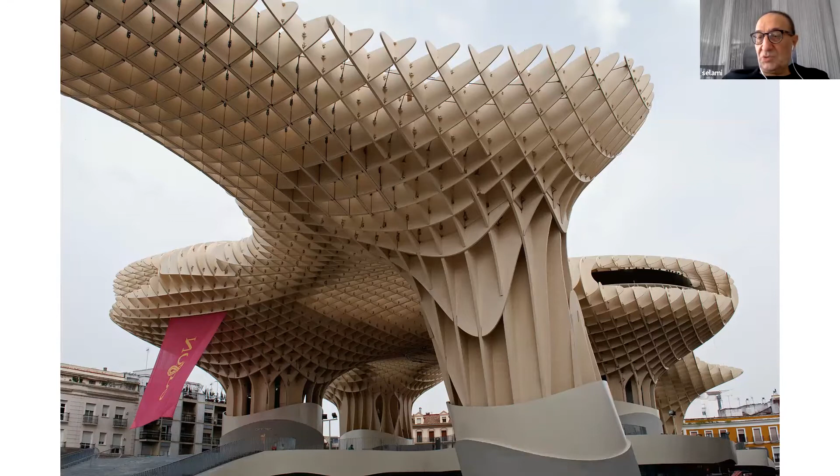Some of my friends, some of their work. Jürgen Mayer, from Berlin. Do you know this project? Metropol Parasol. Do you see my screen? Yes, your screen is seen right now. Okay, this is in Spain.

Only vertical elements in X and Y direction, a wooden frame structure. We worked with him, he also did the south border gate between Turkey and Georgia on the Black Sea, the Sarp sınır kapısı. That is his project for Georgia. It's a 30-meter high steel sculpture.

I don't know what it means, but you are architects, you can name it better than I do. But we did it. This is his image or model, and this is what I fabricated and installed over there. If you are planning to do such a thing, you need a good engineer next to you that you can rely on, who can teach you how to do it. When you look at the dimensions, you cannot carry it from the Turkey factory as ready-made, you cannot ship it there. So what we did was establish a fabrication yard just on the coast, on a jetty on the Black Sea, very near Batumi, north of Batumi. Fabricated, lifted, installed, bolted, welded, painted.

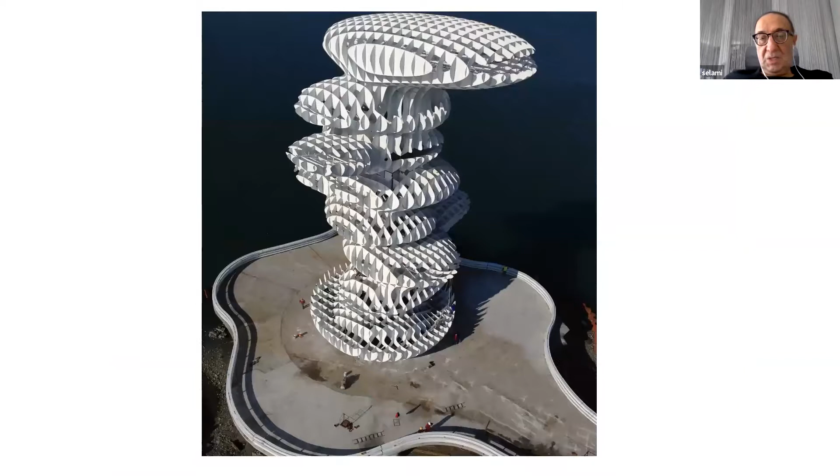This is another project. I'm trying to get some feedback from you, but let me first show you what was interesting for me, then we will discuss what is interesting to you. Such a job is interesting for me because it's not a common column, beam, roof, floors, ceramic, nothing. Here, everything is special.

Similarly, Mr. Fuksas, Massimiliano Fuksas from Italy, designed a shopping mall, Bory Mall, in Bratislava, Slovakia. It is a new development, a shopping mall, and here in the center is a garden, an inner garden inside the shopping mall. As you see, it is a roof and facade combined, and nothing is vertical, nothing is horizontal. All beams, members, all glass dimensions are unique, nothing is repeated.

This is on purpose. When I asked Massimiliano, why don't we make them vertical? He said, no, never in my life. He likes it this way, and that's how he designed it. This is what I built. Do you see my screen? Yes. Do you like it? It's a really quite beautiful grid shell, also the facade, and as you can see on the roof.

This has three functions. First of all, it's a primary structure—I'm talking about my steel here, my steel structure is a primary load-bearing steel structure. Secondly, it is an internal decoration element, there's nothing more, just my structure. I hate when an architect covers my structure because I make it so beautiful. You will see it now in all the details. You cannot do it with any plastering or gypsum, nothing can replace my structure.

But one day Mr. Fuksas said, Selami, I don't like those sharp edges here, can we get rid of them? I said, how do you want it? Send it to me. So he machined all those and said, I want such a node. This is his original design, in his color, the Ferrari color I think it's called.

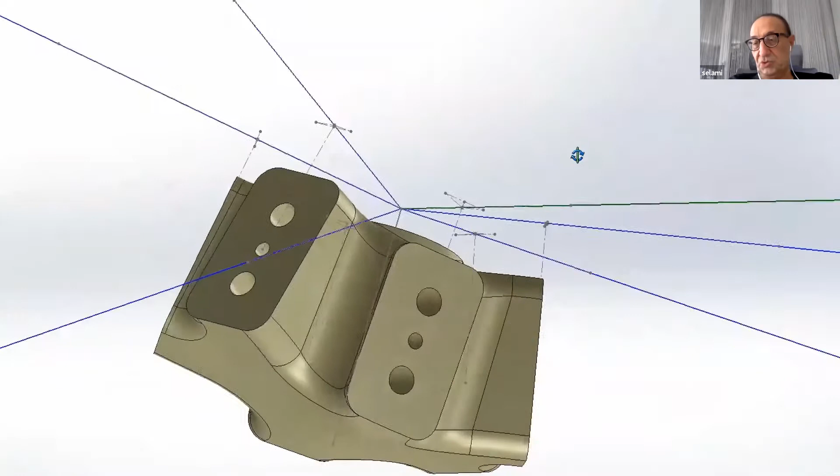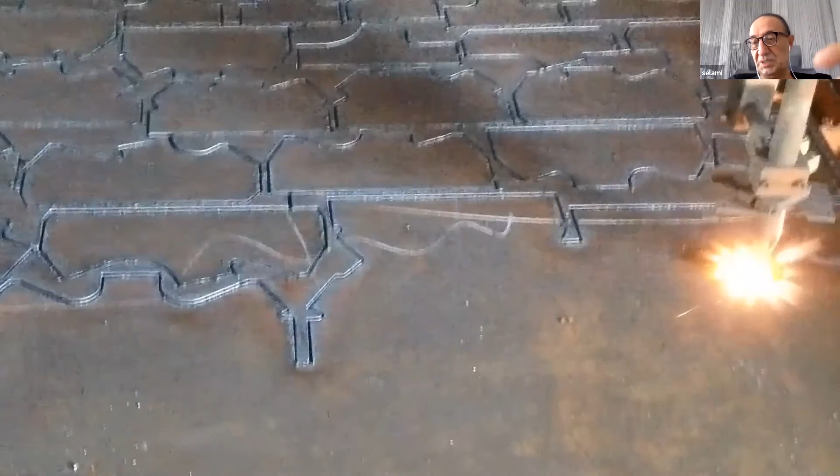Then we started using SolidWorks software. This is something you must learn how to use, dear architects. If you are only working with AutoCAD, don't stay in this job, you cannot survive. You need to move on to better software. I'll show you at the very end of my presentation how today's architects are working.

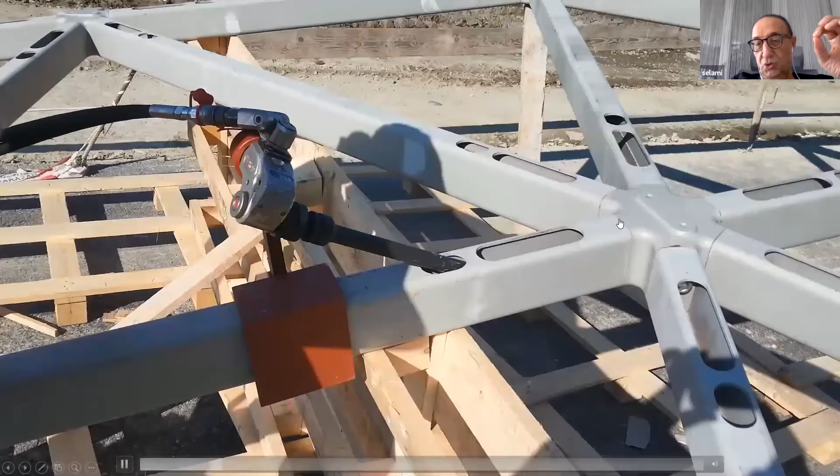Since I am a mechanical engineer, I know milling machines. With SolidWorks, we make the design on the computer and give the order to the milling machine. We finish the node, all precisely, and bolt it together through this opening. Then we close those openings, install on scaffolding one by one, apply fire protection painting, install the aluminum gasket system on the steel, put in the glazing and solid panels, and finish the structure.

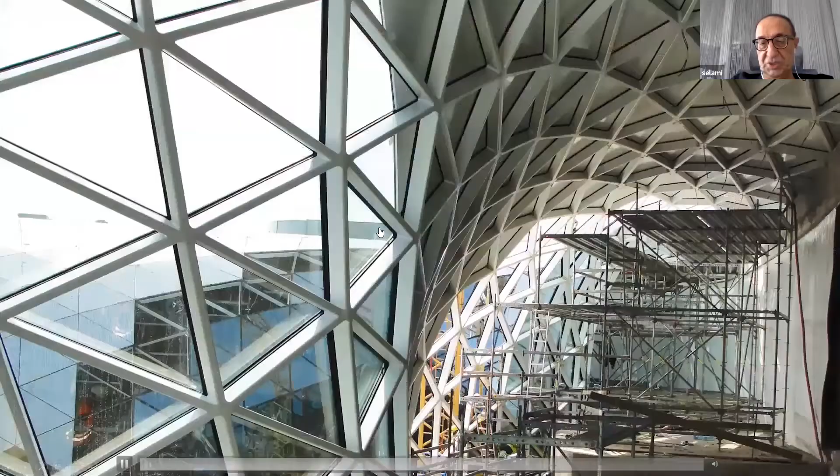I was telling you, this is an outer envelope in the meantime. This system has three functions: main structure, internal decoration, and external wall, all in just one shot.

I would like to show you this detail. This is my product, fully machined. We just bolt them together and make painting repairs, maybe apply the final painting inside. But there is no other alternative in the world to reach such an organic connection. This is why it's under my patent, called the organic node, worldwide.

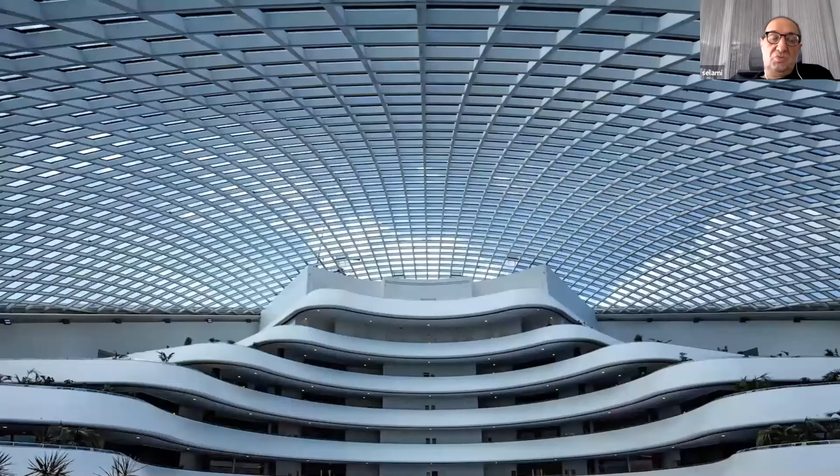Another famous project is by Foster and Partners from London, for Kazakhstan. Foster designed a library for President Nazarbayev, called the First National Library of Kazakhstan. It's 90-meter diameter, no columns, no beams, nothing, just roof. Like an eggshell or a skin, just members and nodes.

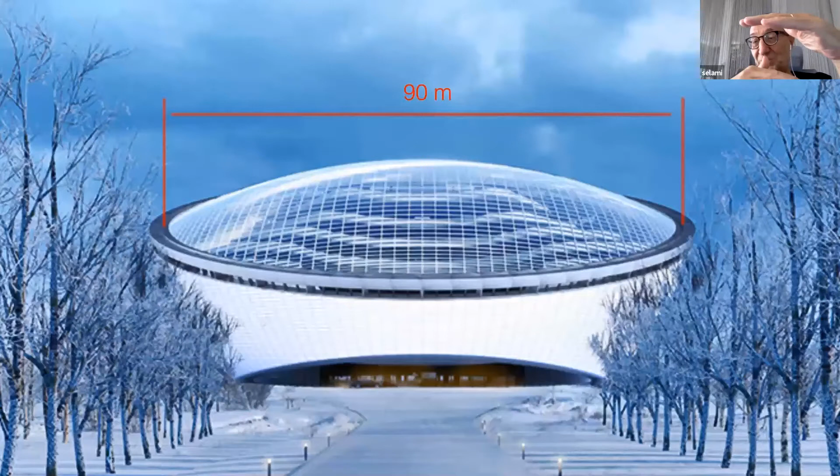90-meter diameter, and the important thing is the height of the steel beam is just 30 centimeters, 300 millimeters high, for steel members spanning 90 meters. If you ask any structural engineer what the height of steel roof members should be for a 90-meter span, they'll tell you 9 meters, or 5 meters minimum. We made it with 0.3 meters.

This is the structural model showing motion and movement. It looks like a balloon, very filigree, like a Greek shell. Of course it's an exaggerated movement, but when you step on the roof you feel like there's a kind of metro passing under you.

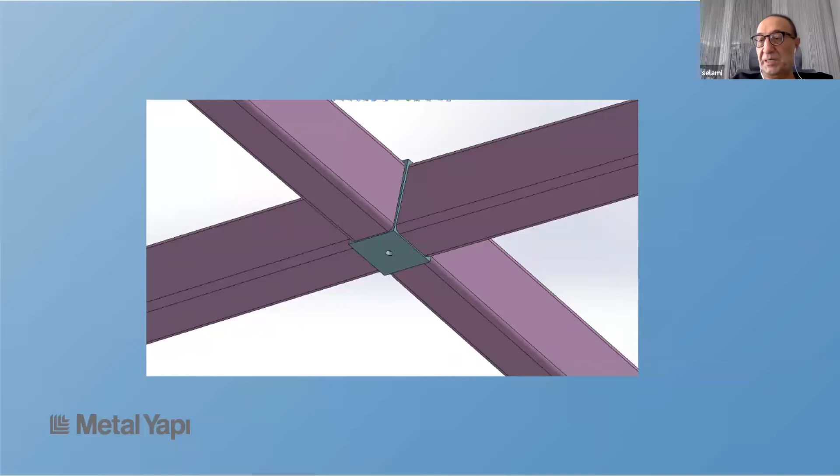You feel some movement. In architectural structures, the important thing is the beauty of the joint. This is not a pipeline where you see the bolts. That's why in my design, we hide the bolts through openings on the upper surface, which will later be closed with glass glazing.

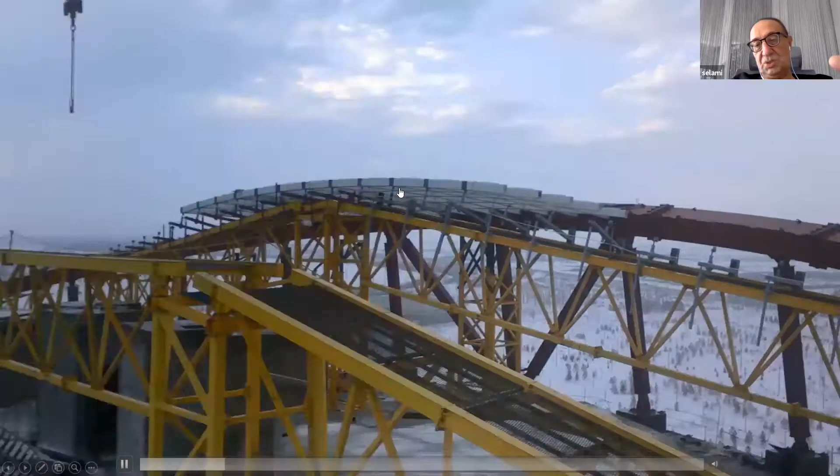Again, the nodes and members are all machined precisely, because any dimensional failure can lead to a collapse of the structure. The members are shipped to Kazakhstan and assembled on the ground in modules, then lifted up. Those yellow ones are temporary supports, about 500 tons, because until the roof is 100% closed, you cannot release the supports underneath.

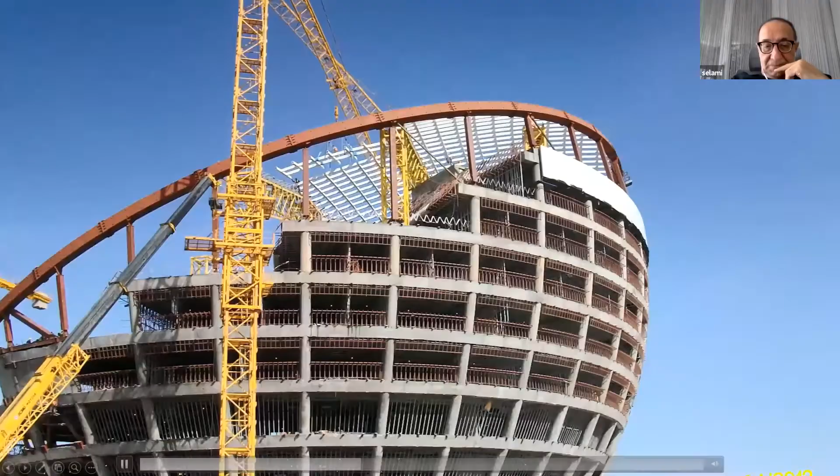See that yellow structure underneath, these are all calculated structurally. We need to calculate them and verify they are strong enough until everything is complete. Then we release the support, and the roof stands on its own structure.

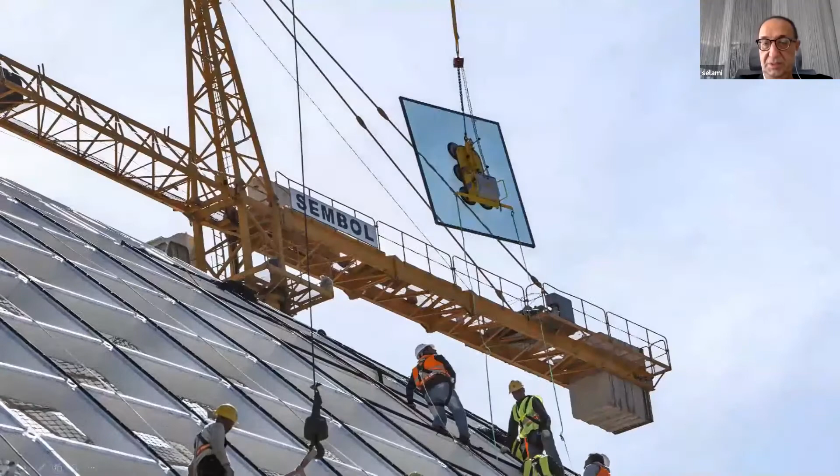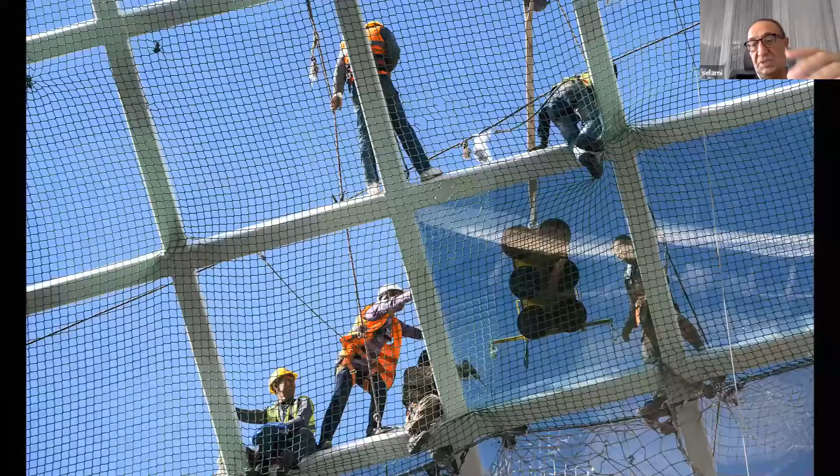Then we start again with aluminum, with glass installation. Installing glass is also done in steps. You cannot do everything, you cannot start from the top. You should start from bottom in a calculated manner. Everything should be calculated, otherwise, since it's a very thin structure, you can face difficulties.

Well, this is one of my favorite projects and one of the most difficult in my life. When my guys in Kazakhstan were releasing the yellow temporary structure underneath, I was waiting for their phone call: is everything okay? There were two alternatives. The roof stands or the roof collapses. There's no other alternative in such structures.

The original structural design was initially made by Buro Happold. Buro Happold is the right hand of Norman Foster. Every successful special architect needs a special engineer just next to him to call and say, I'm planning to design something like this, what could be the minimum size of the member? That's how it starts. You can't rely on yourself. If you are a special architect, you need to have good contacts with good engineers, otherwise you can't do it by yourself. Or you will finish both structural engineering and architecture, like Santiago Calatrava, for example. Mr. Calatrava is both.

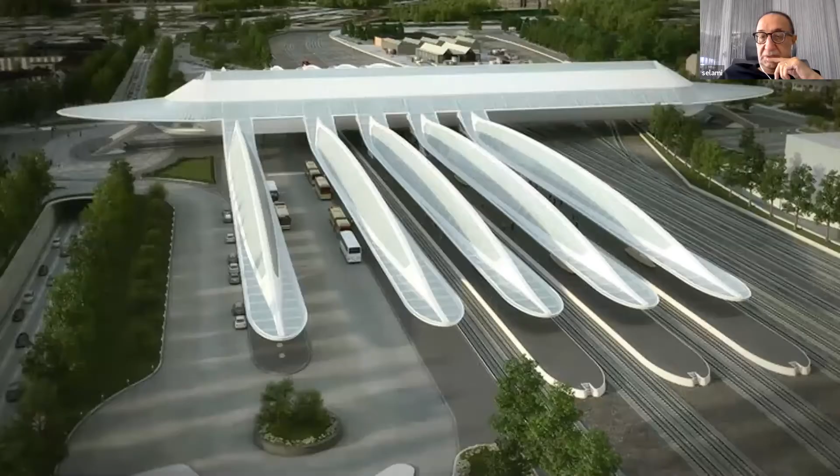So here we are with Santiago. This is Gare de Mons in Belgium, one of his latest. Oh, did I write Switzerland? He's from Switzerland, but that's an existing railway station.

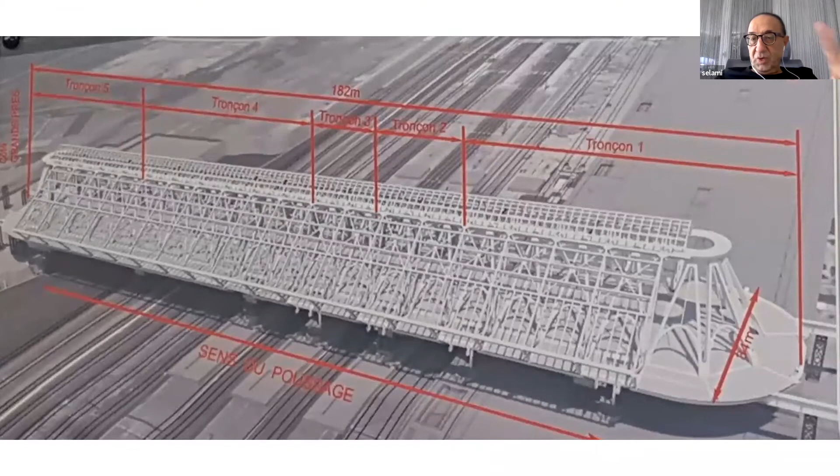You see, here we first pull 3,000 tons sliding. Check the wagons running underneath while we are sliding. Launching, incremental launching method, in the center of Europe, by a small Turkish company. We're not so small, but not a small company, yeah.

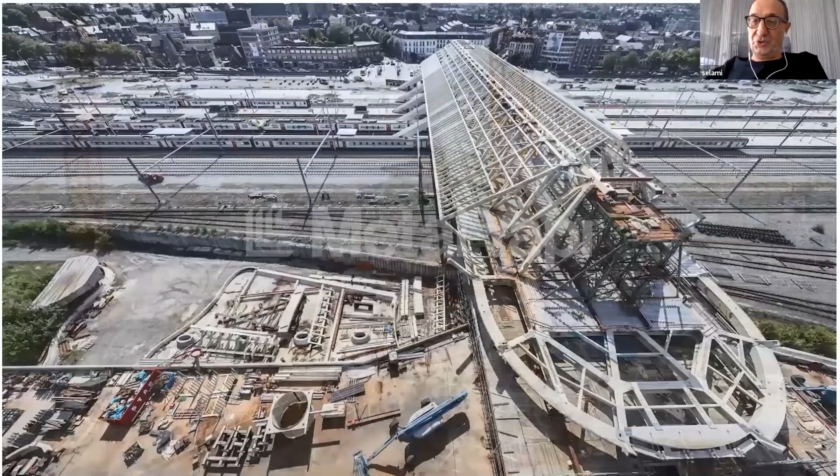If you've been to Kazakhstan, it can be minus 40 degrees. Right now I think it's -5 or so. We are in October. If you're in -5 in Kazakhstan and want to have a walk, you cannot walk on the street. It's very similar to summertime in Dubai - you cannot walk in summertime because of the high temperature and humidity. In Kazakhstan you cannot do it in wintertime. This is why you need a microclimate, an environment that you go into.

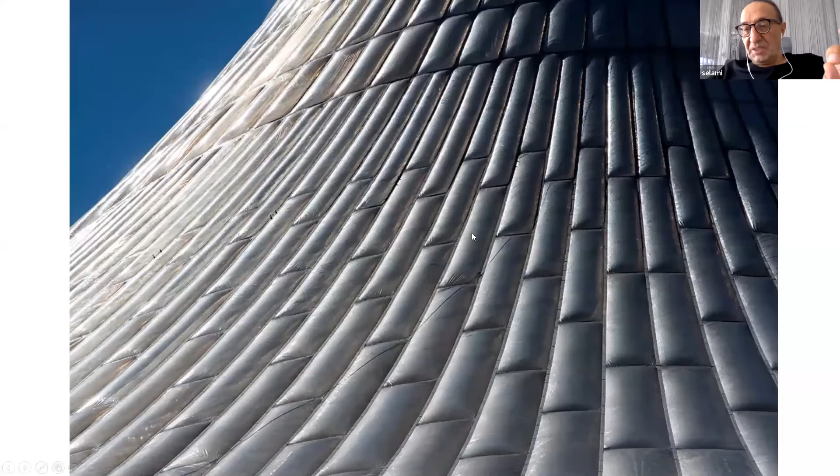The simplest way is to use plastic sheeting as a cover, but plastic should not stop the heat - we need something with a heat transfer value. This is why Foster decided to use an inflated plastic cushion. This is called inflated cushion, using ETFE, ethylene tetrafluoroethylene. Just a central post in the center, steel ropes, and cushions. Finished. This was the most economical solution because tensile elements can be very economical if you know how to use them.

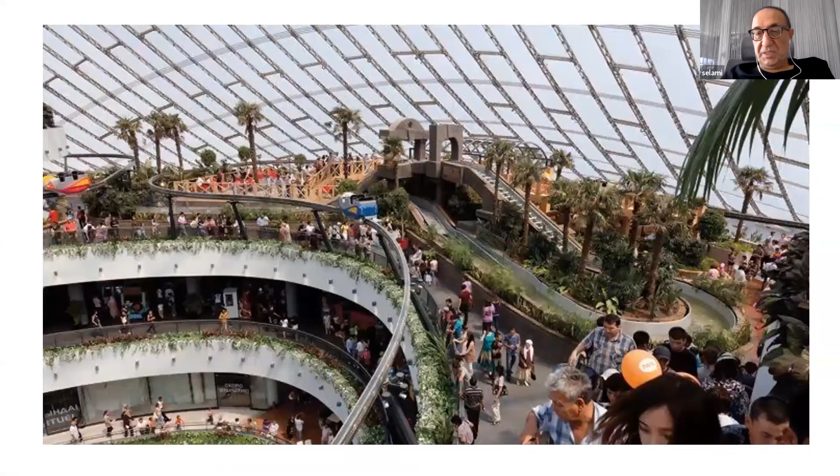Do you hear, Esa? I just wanted to give some explanation - if you have questions, you can ask at the end of the seminar. Sorry, my question was about the National Geographic video, do you hear it? No, I didn't hear it, sorry. We can only see the video but cannot hear it, unfortunately. Oh, that's bad. Well, anyhow, this is a video about me. You should hear it - there's a volume bar on the right side, maybe you can roll it up. We can hear it now. Selami Gürel - yes, you can hear right now.

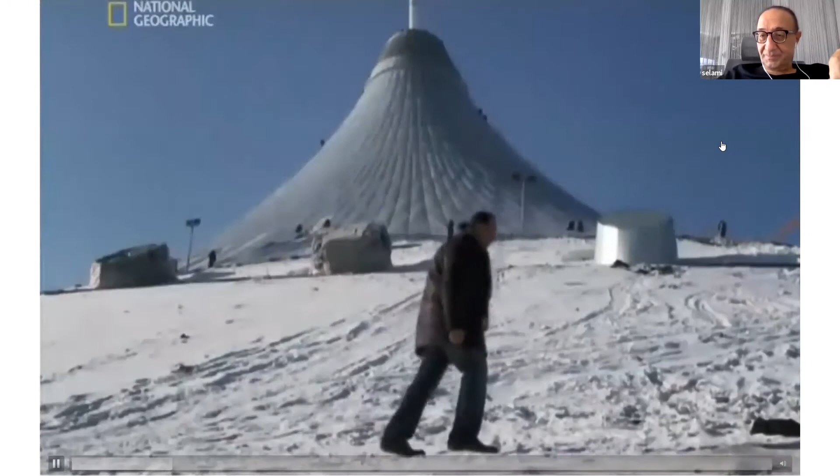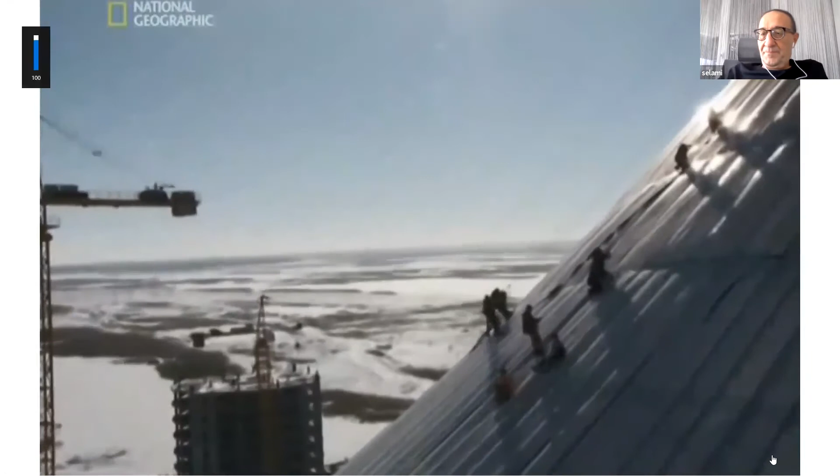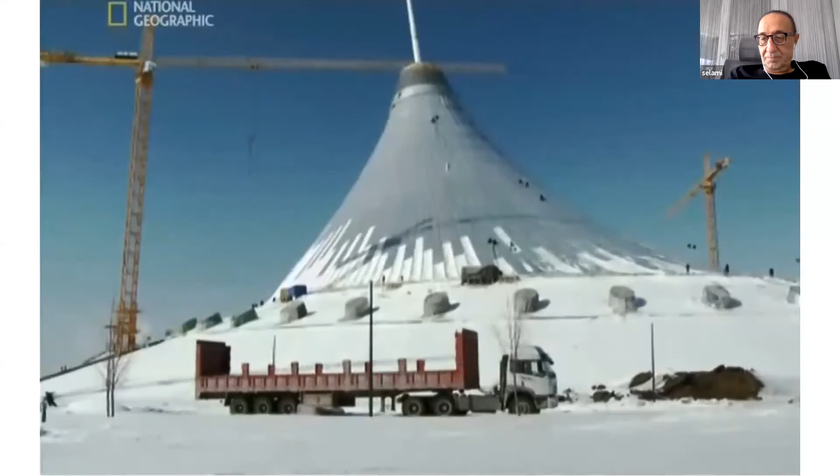The experts talk of the impossible. Selami Gürel says the pressure is just the time - everybody wants his building on time. But in this weather, it's very, very difficult. Even in a good year, winter in central Kazakhstan is bone chilling, and this winter has been unusually extreme. When the wind starts, you feel minus 55. It's so cold that for many workers it's a fine line between life and a freezing death. I remember one day they said someone is frozen up there, so the team went up and took him down. Such things happen - the frozen worker survived.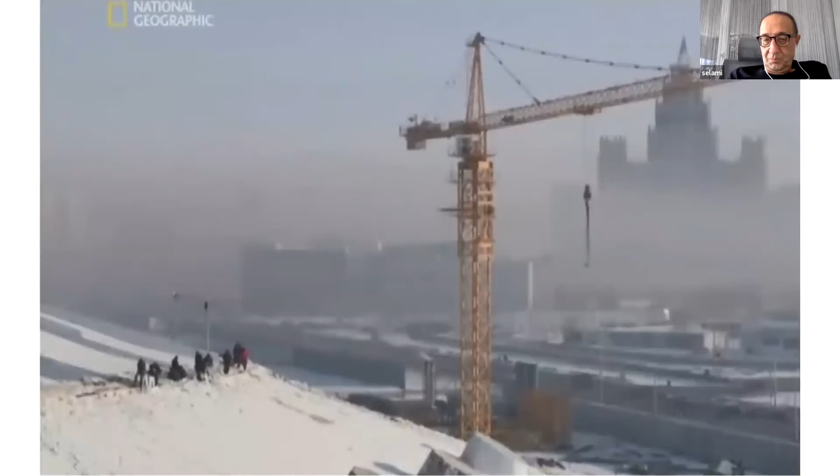But Selami faces a far bigger problem than the kiln - Kazakhstan's president, Nazarbayev. The president personally commissioned the building. He's tired of waiting for it and has demanded it must be finished in time for his birthday - just 18 weeks' time. And in Kazakhstan, when the president shouts, everybody jumps. The next stage is to build and erect the tripod pole, a 2,000-ton steel structure that will rise 150 meters into the air. Unfortunately, it seems no one can agree how they're going to do it.

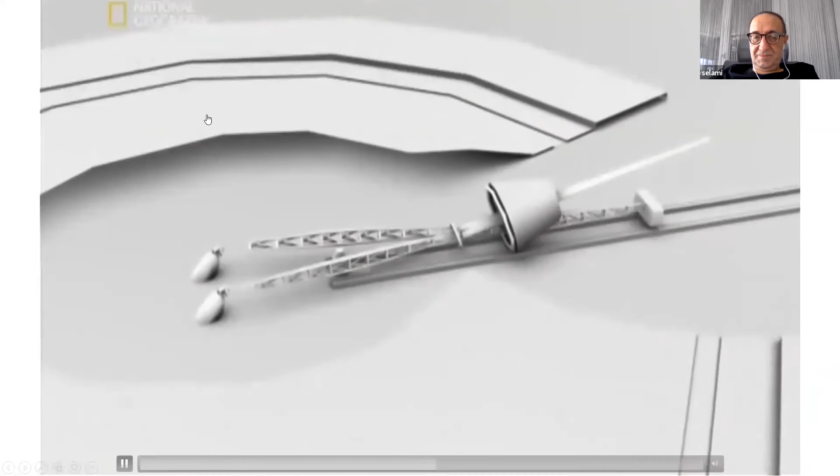Time to bring in the troubleshooter, Selami Gürel. Building it without further delays was a challenge Selami was determined to solve. Being a 58-year-old engineer, he had the idea that he wanted to assemble everything on the ground, then have nothing left to do in the air. Imagine, you should rent eight cranes - instead there will be high-tech winches. Selami's team will build a 60-meter tall tower, on top of which he will put specialist winches known as strand jacks. The jacks will pull up the tripod on its hinges, with the third leg sliding down the track into its final position. It's never been done before - no one knows if it will work.

Well, I think that's enough for this project. But method is important - how to do it. You cannot weld a 2,000-ton structure up at 100 meters at minus 40 degrees temperature. You must do everything on the ground, covering with tents, heating the steel, heating the welders.

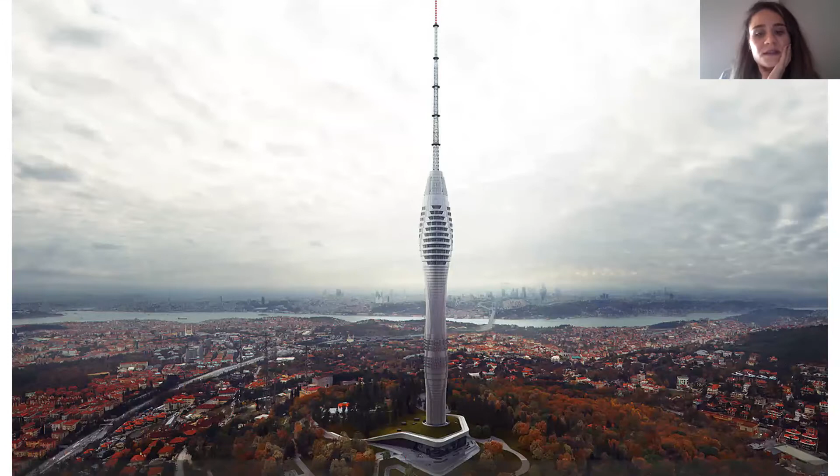Anyhow, that's another fantastic project that Melike Altınışık did - the new television tower in Küçük Çamlıca, Istanbul. Do you hear me? Yes, yes, I can hear you. We can stop for the previous project - I'm sorry, Mr. Gürel.

For the previous project, this is really exciting to see that you're also conducting a construction process design too. I think it's really quite important, because even if it is a safe structure, if you can't install it, it will not exist. So you are also designing some equipment just for this construction - I think this is the most important part.

Yeah, let me tell you one thing - this is called method of statement, MOS we call it. Shortly, MOS, method of statement, means a designer, while designing something, should explain how to build it. But unfortunately, in this project, neither Foster and Partners nor Buro Happold defined any methodology, which was a big mistake. Then I dictated the methodology - thank God, Sembol said, 'Selami, that's your baby, do it.' So I took it. The method, how to lift it, is only my pure thinking - this was my first hand sketch. I said, let's do it that way, and we did it.

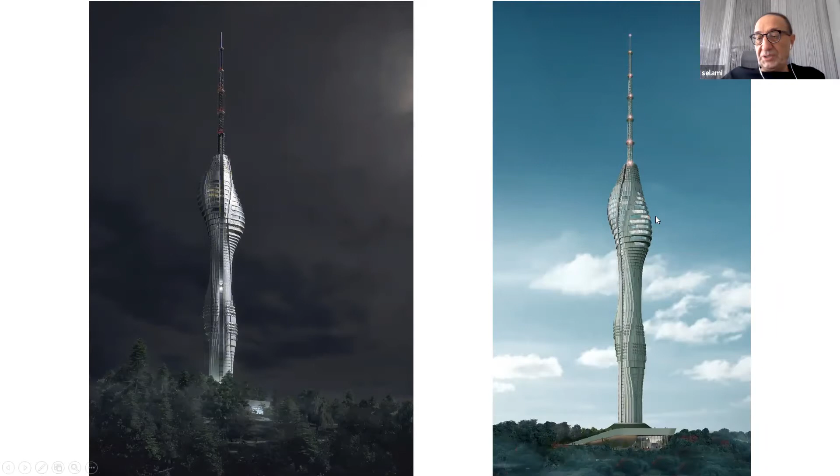The way you will see now in Melike's tower project, up to here is 200-meter concrete core. Above is 160 meters of steel antenna. And the outside is GRC covered, glazed, and GRC solid panel floors, as you see here. The antenna is 1,200 tons, 160 meters.

The method, how I lifted it - after the antenna lifted up, we must connect it with the concrete. This drawing, this AutoCAD drawing, is my own sketch. I did it in one night. I asked my guys, what is the dimension of the core?

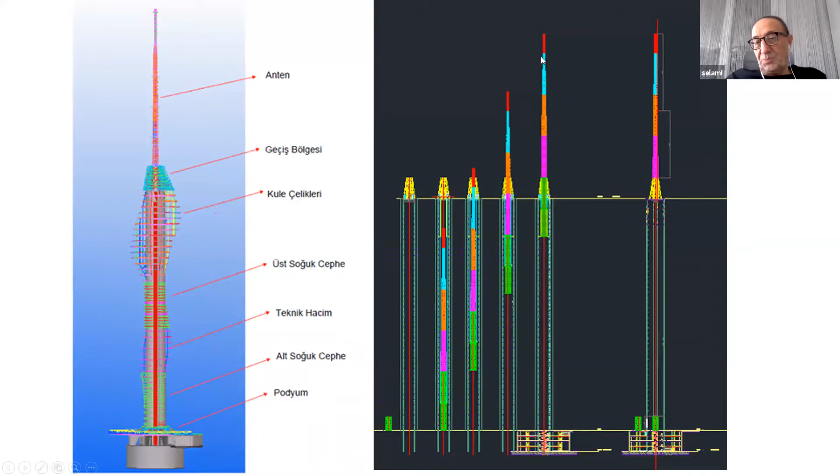That's the core. So if we make an opening here, I can put the antenna in, lift up, put the second one in, continue lifting, welding. So I built everything inside the concrete core. Then I hold the whole antenna and lift up like a telescope system. So this is how we design.

That's also from my design. I put rails here and the antenna. Here in the original design, there was a staircase. I said to Melike, don't put the staircase now. We will build it later. Let us first finish the antenna, then we lift.

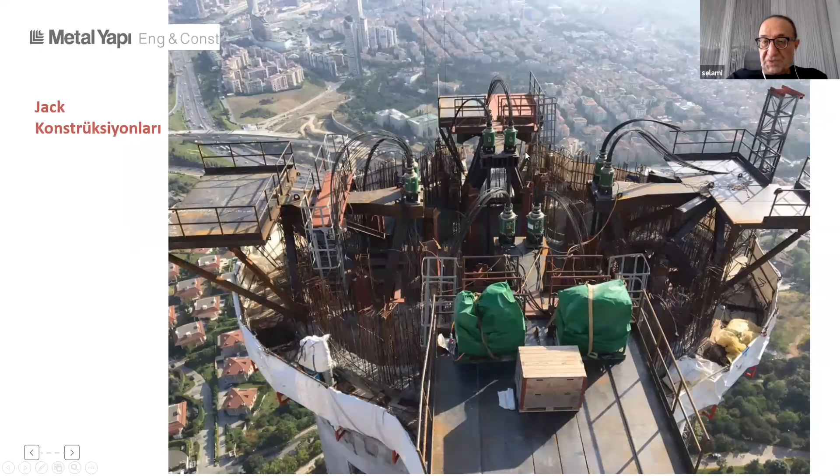These are the hydraulic jacks lifting, 200 ton each. We have 8 of them. This is the temporary structure for lifting. See, all that structure is temporary here.

This is the internal core. That's a temporary opening on the concrete core. This is my design, a simple sliding roller carriage, let us say, pushing by hydraulically step by step, going in.

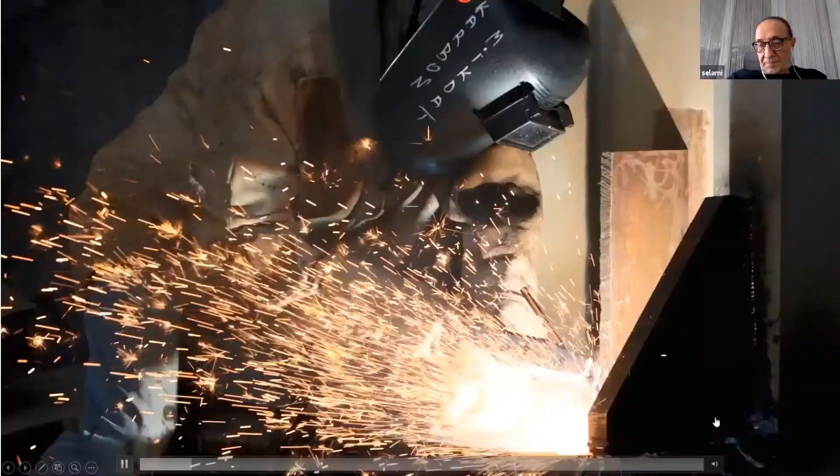The carriage, let me go a bit fast. Top lifting piece. There was a video here, I think. See, the pieces, the parts are finished outside, slide in, and then welded inside, lifting one by one. Lifting, welding, the other piece.

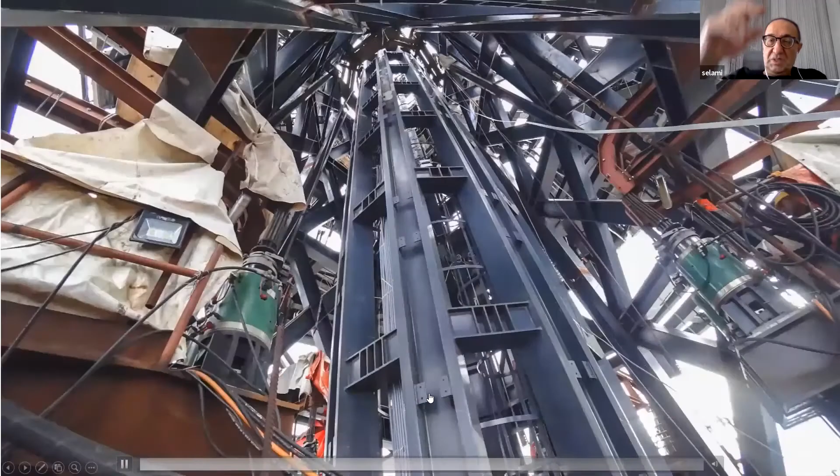See, I had some guys who love to live up there. They can sleep over there. I can't imagine. How come they go?

So after we have finished the antenna, we started building the external part, the floors, let us say. Can you see those green pieces? These are the hydraulic strand jack, we call it, hydraulic strand lifting unit. This is the cable coming down.

We finished this block, about 1,000 ton, and jack up to 100, 200 meter. And then weld all the beams to the embedded anchors inside. You see, it's going up now. The block is going up as a whole.

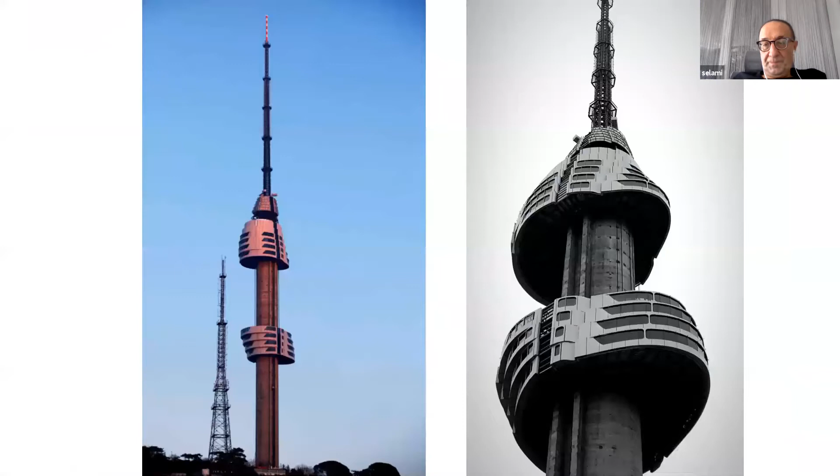Then we start with the second. See, this is the first block, 4 floor. The second block, another 4 floor. Third one, fourth one. Can you imagine you are installing this GRC up in 200 meters?

By the way, in this construction, one of my workers fell down and died, unfortunately. If we were not using such a system, I don't know how many people was lost.

So this is somehow some precast system. So you're installing all these floors on the ground, and afterwards you lift up all this structure and embed it into the RC concrete core, right? Right.

This is, I think they put some lighting now. I don't know the final case, but my work is finished here after lifting all those heavy parts. But that part is just the skin, nothing special, no steel. So that skin part, they have finished, the main contractor finished.

But I believe this is a success of Turkish architecture. Melike Altınışık worked with Zaha Hadid in London in the past. She is very special. I mean, if you can meet with her, if you can work with her, you will enjoy it terribly. But she's highly software-minded, you know. You need some special software.

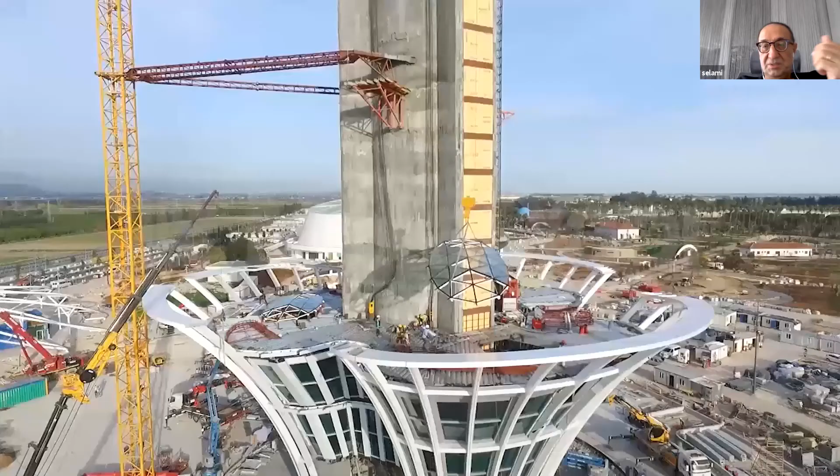Similarly, Nita Architects, I think they are from Antalya, the Expo Tower in Antalya. This is another story we did. Still, the main contractor does not exist and has a debt of 2 million euro to our company. Still, we are waiting to get our money. This was in 2016, 4 years ago.

Let's go fast just to show you how we are lifting.

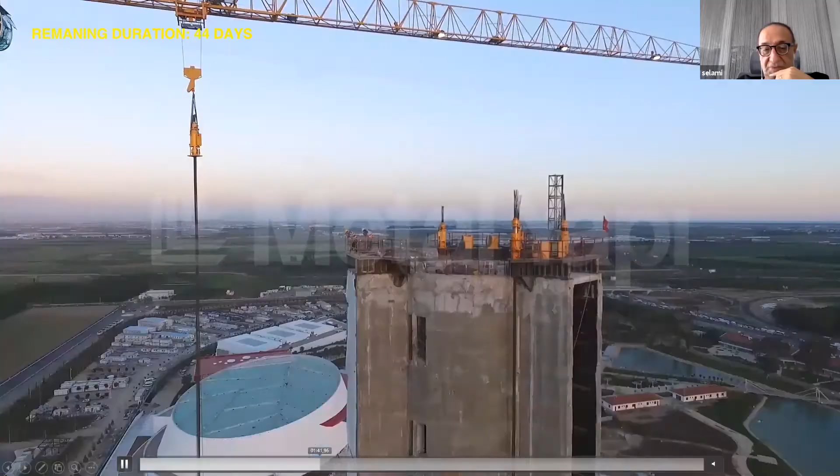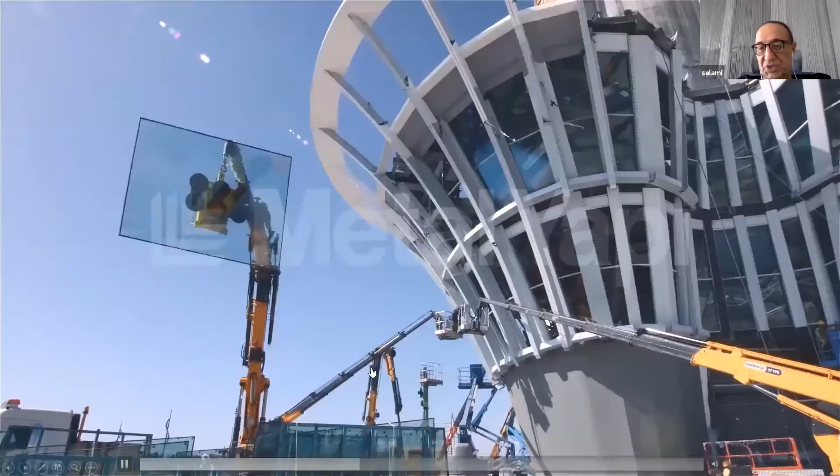Hydraulic jack. Guiding roller. These are all temporary. Skylight. We finished everything on the ground.

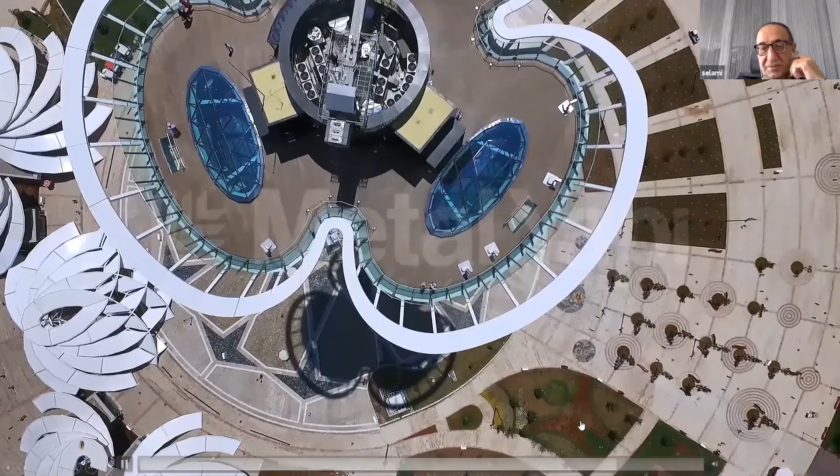Kazakh Pavilion. I don't know if you know this company, Adrian Smith Gordon Gill from America, ASGG. They are also very special. SOM architects, you know, SOM architects. They were senior architects in SOM before. Now they're their own company.

That's an expo center. Expo, I think it was 2017. Anyhow, here is the Kazakh pavilion, 80-meter diameter glass glazed.

I don't know how an architect starts designing an expo center, but here I understand that. Adrian Smith, Gordon Gill, they said, let's put Kazakhstan into the center and put some other pavilions and give them to the other countries. And on the external perimeter, they put some hotels, etc.

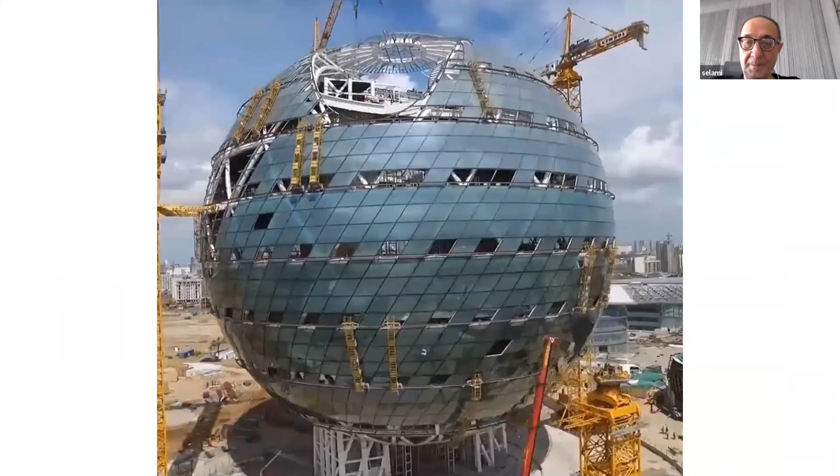And the way they design it is always with grid shells and everything, like this. Today's architecture. What I did, I made the main primary steel structure, including design of it. This is a really difficult steel structure. As you see, everything is curved with radius, expensive.

I don't know if you can see the man here, how small is the man? That's the beam on the second floor. Expo, I don't remember, 12,000 tons. For me, when I say steel structure, it is tons.

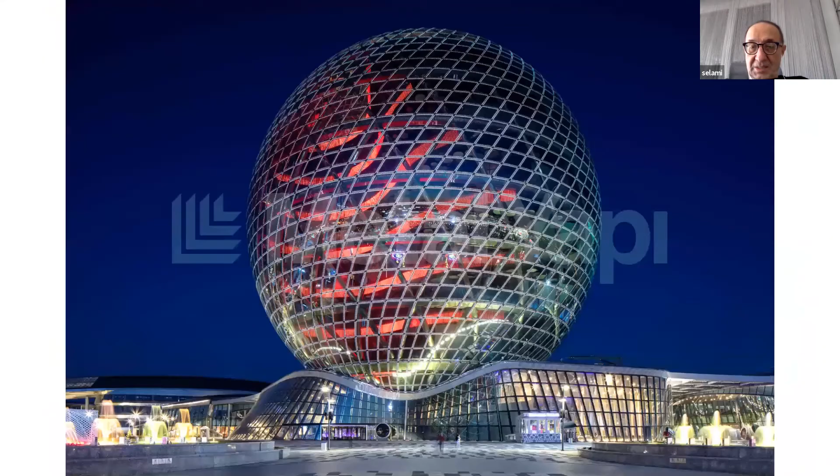I have another one now, a recent project in Abu Dhabi, Sheikh Zayed National Museum, another Foster project. We have 15 minutes. Yes, Esra?

Sorry, yes, approximately, and maybe some students may have some questions to you after your seminar ends. Yeah, okay, I have some.

This is a terribly difficult project. Foster and Partners made the most expensive museum in the world. If you ask me, frankly speaking, I don't support such money expenditures while half of the world is hungry.

Anyhow, this is United Arab Emirates. I think you have some guys from Emirates. Do you have some students from UAE or which countries do you have?

Anyhow, we'll talk later. Here, my mission is not very big. I am making the gates here. You see this entrance gate on the left side and that entrance gate on the right side. And those pots, they call it pots.

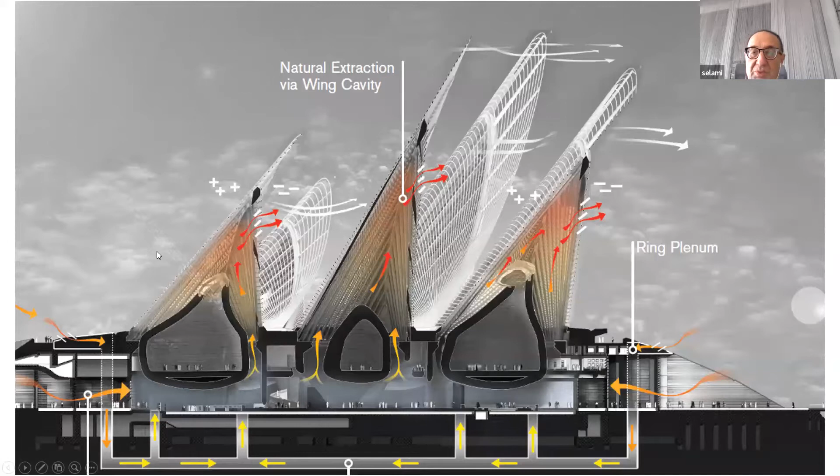I don't know what it means, but this is a terribly difficult double curve structure here. This is glass. This is glass. These are all stainless steel wings, they call it. And that is our fabrication, all double curve. And this is, for example, a 10-meter high steel gate, opening and closing, 6 pieces.

Since I'm a mechanical engineer, I designed those opening and closing mechanisms. Anyhow, up to now, I have shown you what I did. But from now on, I will show you what I advise you to do.

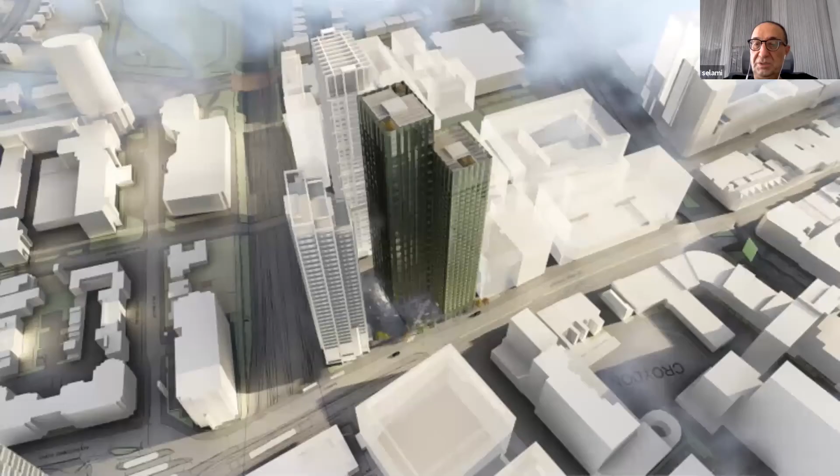Modular buildings, off-site construction. If I was in your age, I would start spending time and money on this subject. I'll show you a very nice project in London, Croydon House.

Assume that you are in the middle of London. There is no construction yard, only the building area. Here, maybe you haven't noticed, just this part, you cannot put even a truck inside. Just a truck can come.

Nighttime, you lift it up. Right side is full, left is full. Each side is full. How can you build such a high tower in the middle of London, where the land is expensive, where the labor is very, very, very expensive?

How did they do it? This company, Vision Modular, take a note of this name. Vision Modular is one of the best. They built a 44-story high modular building. What is modular building? Modular building is fabricated in a factory, fully finished. I'm not joking, it's fully finished and then put in place by cranes.

Of course, the concrete core here is made by slip form or whatever. But those blocks, rooms, or houses around are all modular, fabricated in a factory and then lifted into place, chick, chick, chick, chick. 95% factory finished.

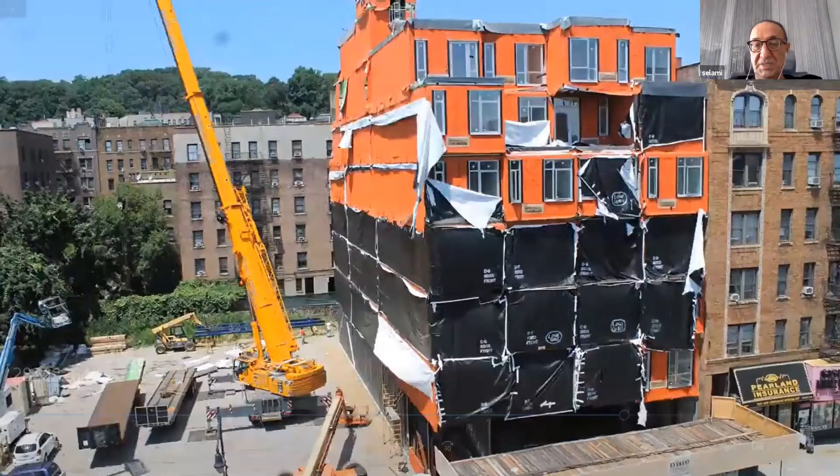So for example, this is in New York, the Stack - that's another very special modular building. All the house comes within a package, and you just put it on top of each other. That's an apartment in Germany that we have designed - not me.

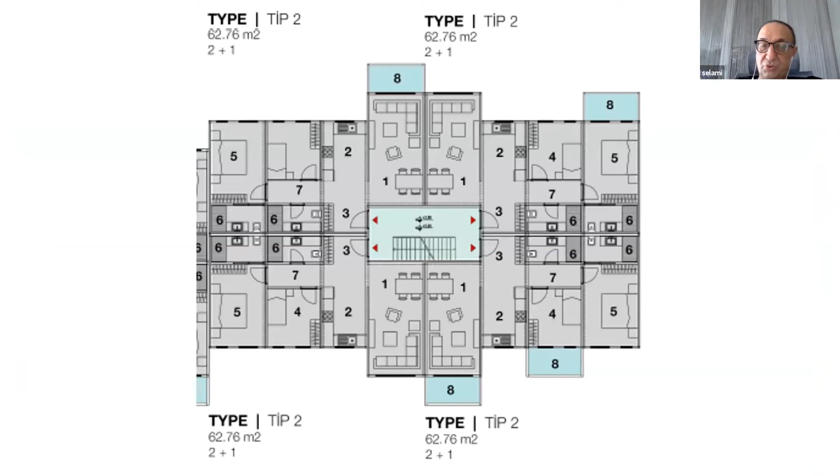ARNC architects from Istanbul - Berk, very clever guy - designed a 3-story building for a German suburb. You see, in modular building you need to know how you can design by simple rectangles, how you can make a 2-bedroom, 1-bedroom, sufficient living space. But the logic is always rectangles, rectangular plans.

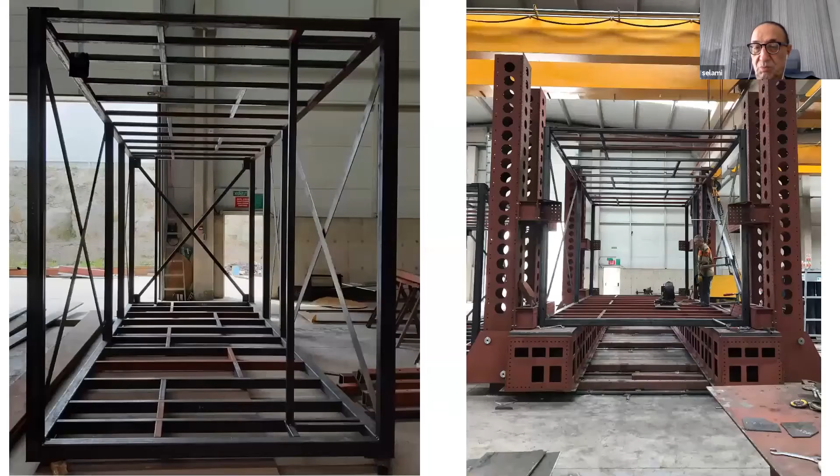This is, Esra, I'm very serious - this is for the future. If you are working for the United States, UK, Germany or France, you can sell this system. That is the future for expensive land and expensive labor countries. Not for Turkey, not for Africa, I repeat. This is expensive.

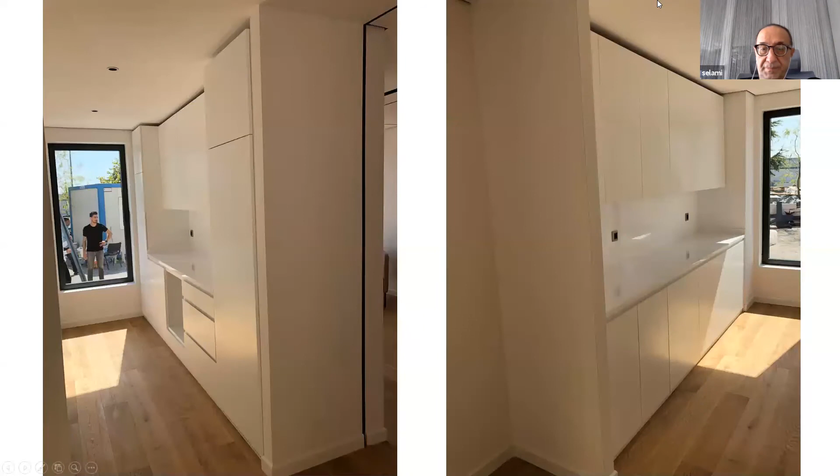Bathroom pods - for the tower building, we make a ready-made bathroom. The bathroom is the most difficult part of a house. Why? You need ceramic, you need electric, you need piping, sewage, hot water, radiator, bath tub, closet, reservoir. Can you imagine? Nobody allows you to do it in London in a town. They buy it like this and put it on - on every floor, when they build, they put it on. That's another job for you. We need good architects to design economical, good products.

What was it called? Bathroom pods. We also have kitchen pods - you can sell the whole kitchen, including Beko products, furnaces, oven, or whatever you call it, refrigerator.

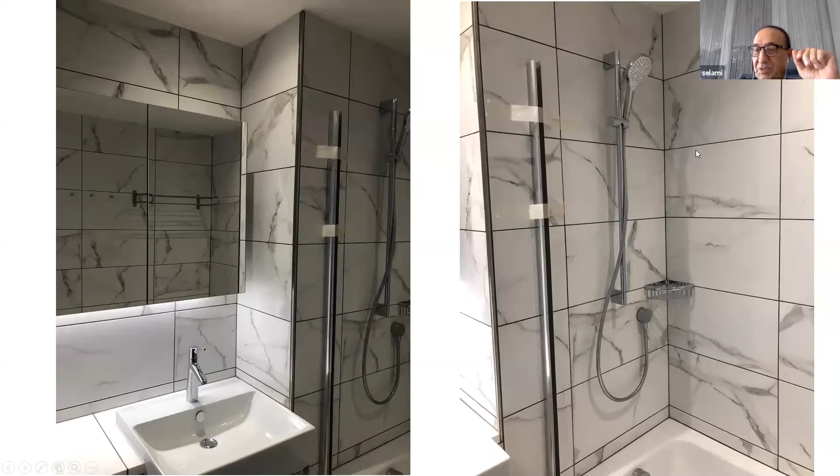I remember when the British inspector came to our factory, I threw out 3 prototypes because the distance between 2 ceramic tiles was not parallel. 3 millimeters, he said - he was shouting at my engineer, 'Can I see your 3 millimeters? Show me your 3 millimeters.' My 3mm is this much. Why the hell is yours 5mm? Or on this side 2mm, other side 4mm - it should be just 3mm. I don't know, I mean, I never do it myself if I am there.

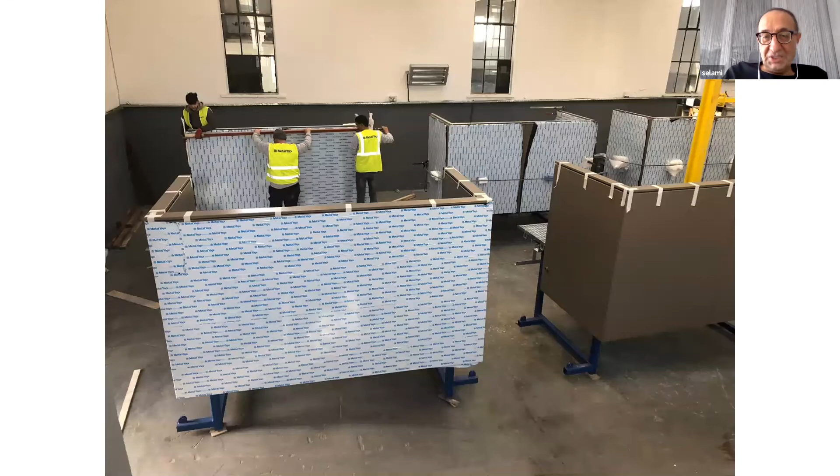Another special job for London is the balcony, ready-made balcony. The building is finished, and then chick, chick, chick, we put the balconies on from outside. These are from our balcony factory in Istanbul. We finish everything, put it on a trailer and send to London. That's in London - they lift it and install it.

This is not good money, not very profitable. I don't advise you. Well, anyhow, we are doing balconies in London now, shipping from Turkey.

Now, Esra, I added this - it was not in my presentation, but it's very new, and I want you all to know about this. Thank you very much. Take a note: monocoque. Monocoque is a very special word, monocoque.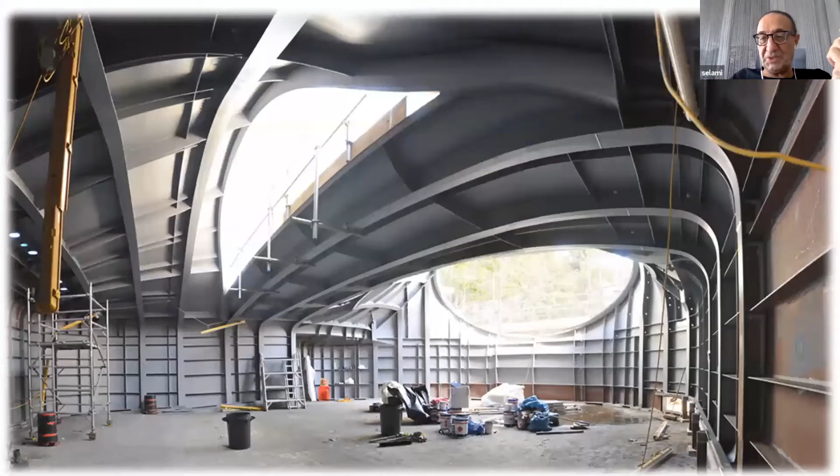It's in fact skin with stiffeners inside, load-bearing stiffeners. When you go in a ferry boat with your car, let's say to Mudanya, yeah? That ferry boat is made of aluminum. And as you see, the external skin has very nice curves, and internally there are stiffeners. This is called monocoque technology - there's nothing else.

Before, there was a heavy steel structure, with some external skin, and an internal decoration.

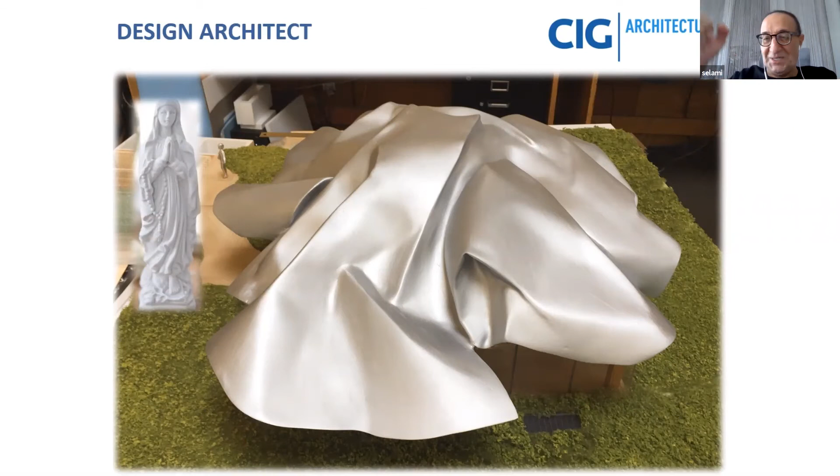Now I'll show you Frank Gehry's Colorado Pavilion. You know Mr. Gehry, I believe. That's his design. I heard he just scratched it down on paper, threw it there and said, Esra, I want this. So that's it.

Take note of this architecture company name: CIG Architecture. It is the number one 3D architectural manufacturer of metals. This piece is made of metal, stainless steel, about 6mm thick, formed into shape.

I want to show the steps of design, the creation of the 3D model. First, you should learn how to convert the architect's wish into a readable 3D model. The best system today is Rhino, but Gehry uses another system, CATIA-based, called Digital Project, or DP. It's expensive, but you can find cracks. Try to learn Digital Project, it is for the future.

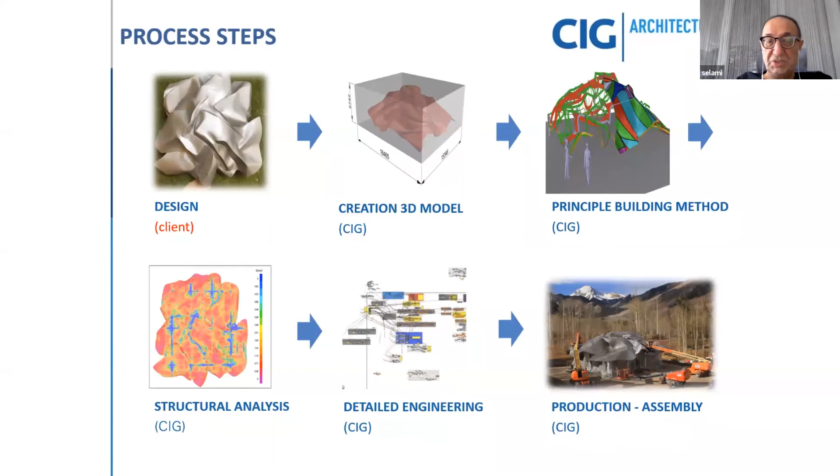Not only Rhino, but Rhino and Grasshopper are unavoidable. If you don't know them, never come to my office. If you want to work in such an environment, read up on this. The 3D architectural design uses 3DM, which is the abbreviation for Rhino documents. This is Rhino, and from Rhino it's controlled by Grasshopper. Grasshopper is also a must today, ladies and gentlemen. If you know Rhino and Grasshopper, you can work in this company easily, of course with fluent English and a nice accent.

This is by chance, Esra. I got to know this company just two days ago. I wanted to share it with you because I have a very special project currently in Saudi Arabia, but unfortunately the Saudi Arabian authorities are putting some embargoes and sanctions.

Feras, are you Saudi? Actually, I came from Saudi Arabia. Where are you from originally? Syrian, I'm Syrian actually. Oh, lovely, you are one of us. So what do you mean you came from Saudi? I've been in Saudi Arabia for a long time, since I was born. Your parents are living there, right?

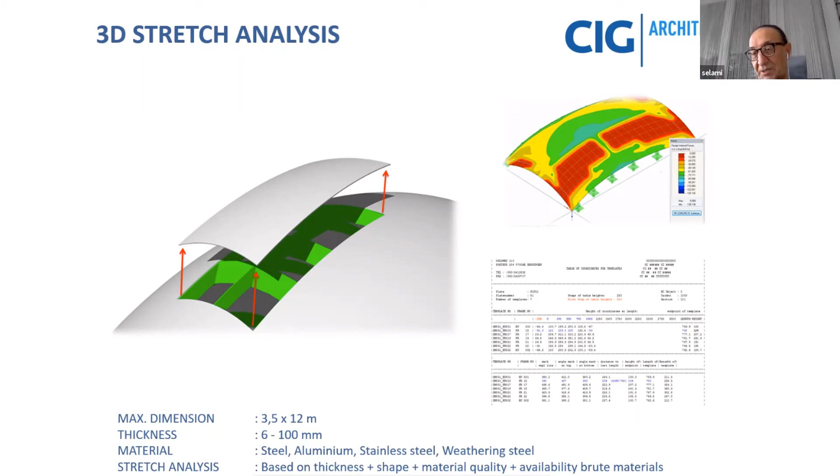This small machine, Esra, without mechanical engineers you cannot live. You need good engineers, you know. By pressing, you prepare it.

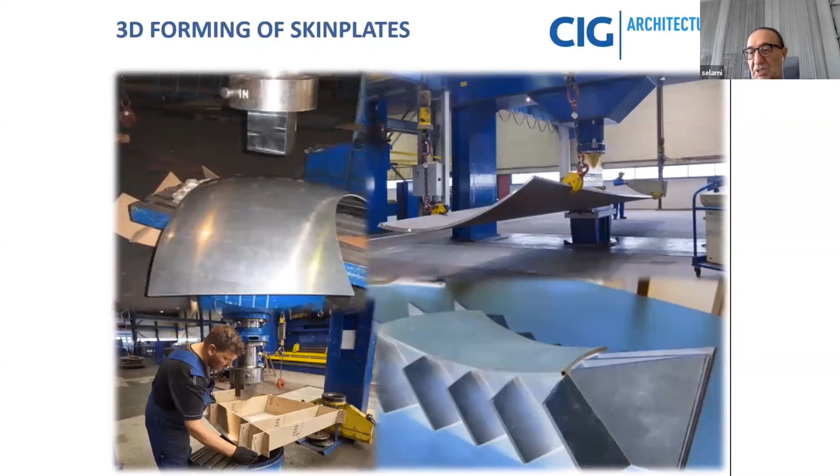Similarly, like metal, we have concrete products with double curves. Double curve is the future of everything. I highly advise you to check this company's webpage, CIG-architecture.com, CIG Architecture. They are very, very special, I mean after me.

UHPC, ultra high performance concrete, looks like GRC. Can you see this geometry? How can you do this? Put yourself in the position not of the architect, but of the one who will build it. Assume Zaha Hadid wanted something like this, and we together will build it. How can you do it with concrete? Is there any idea how we can build like this, guys? Layering technique, maybe? No, it's technology, I'll show you the technology.

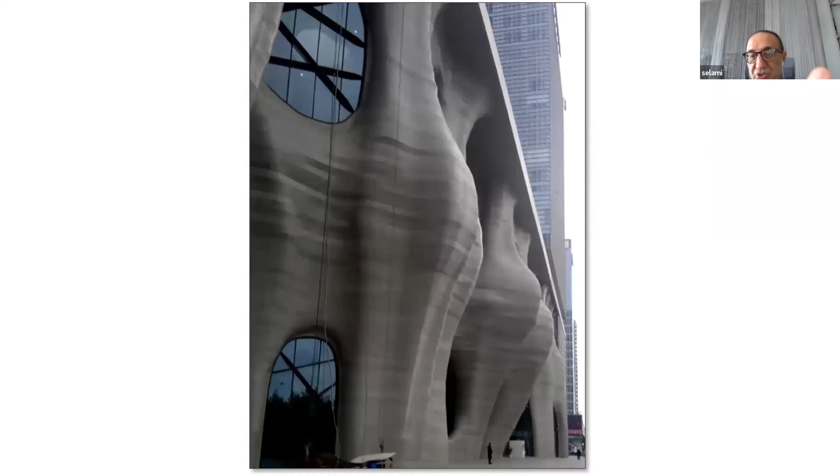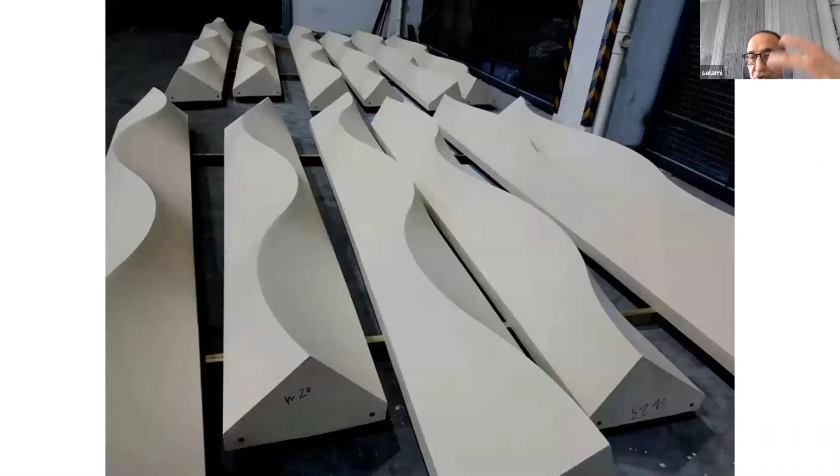Can you see the geometry? The double curve is a natural shape in nature, like wood, a leaf, or a bird. Those are able to carry themselves like a monocoque system. This is for Melbourne, for instance. All those are concrete products, but very thin and light, yet very strong. Here in France, the roof of a station has no steel, nothing, just the roof piece, made of concrete, finished and painted, that's it.

No decoration, no external cladding, no internal steel structure, nothing. That's also the future as high-tech architecture.

Here, Qatar, for example, Al Rayyan—can I ask a question? Sorry to interrupt, but you mean there are reinforcements inside the concrete? You mean fiber reinforcement? Yes, yeah, okay.

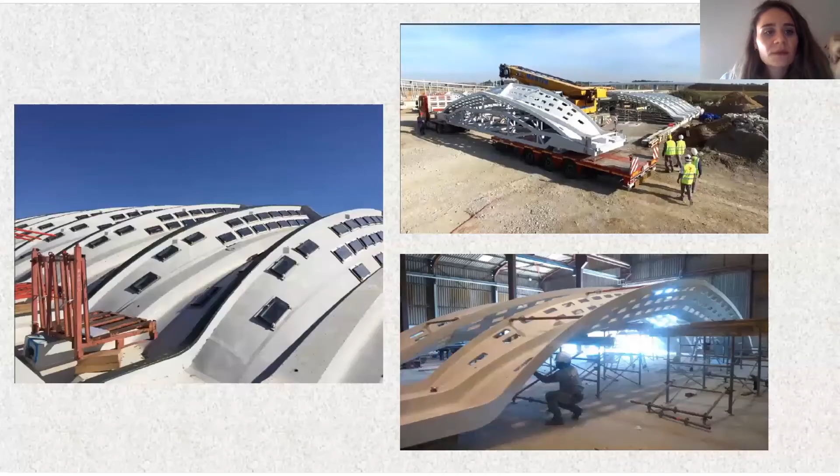When I say GRC, it is glass fiber reinforced concrete, sometimes called GFRC. But now we are talking about a concrete level higher than that—ultra high performance concrete, again with some fiber reinforcement inside.

You're not supposed to calculate it. You should know that if you make something a double curve—a thin shell able to stand by itself due to its form—it becomes the most economical solution, and also the most long-living solution. You just need some painting, maybe.

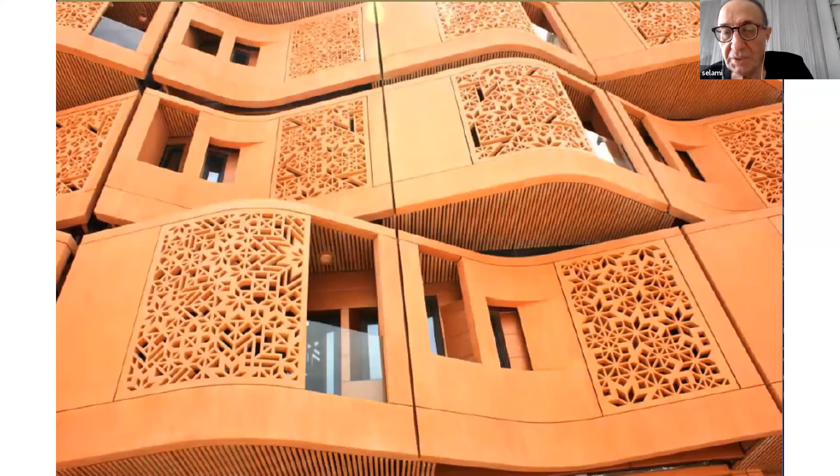All right, Al Rayyan—for example, I think this is in Dubai. Some of you may know Masdar Plaza Housing or something. You see, this wall is not only decoration; it's an external wall, fully finished.

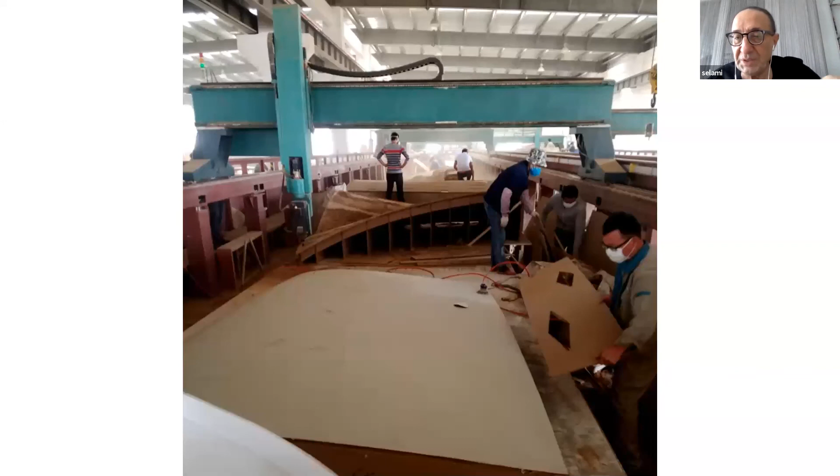This is the machine to make the form. Again, you need mechanism and machinery, but it's very cheap. You make some wooden layers, glue them, and then mill it. This becomes the formwork for your product. Then you just spray the UHPC that you buy from Lafarge. Now my expensive stuff is finished.

My last five photos are about the very economical solution for Africa—Mali and Mozambique. I had a chance to work with architect Diébédo Francis Kéré, a very special guy from Burkina Faso living in Berlin. You should know him too. He finds financing worldwide from the Aga Khan Foundation or others, and tries to develop projects for Africa using their local materials.

This is a very simple job I made for Mali, Bamako—the National Park of Mali. He first was teaching the Africans how to make the bricks themselves. What I did was only the steel roof structure, because you know African rain—when it comes, you're finished if you don't have a good, strong roof structure. I just wanted to show you something very economical, very cheap.

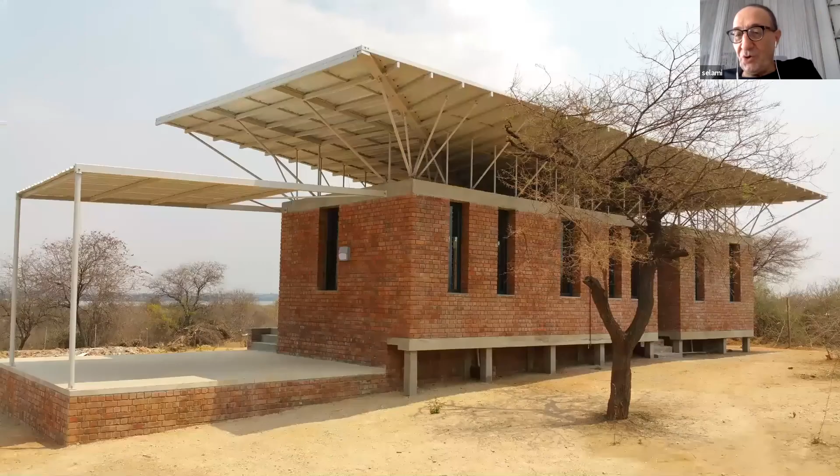When I designed it myself—because when I give it to one of my engineers, they just prepare it as a welded structure. But how can you ship a welded structure from Istanbul to Bamako? Or this, for example, for Tete in Mozambique—you have to find something boltable, disassembled, no welding. The pieces must be easily packable.

You see, these are just simple pipes, all very nicely fabricated, no distortion, nothing. Well, I think I am finished.